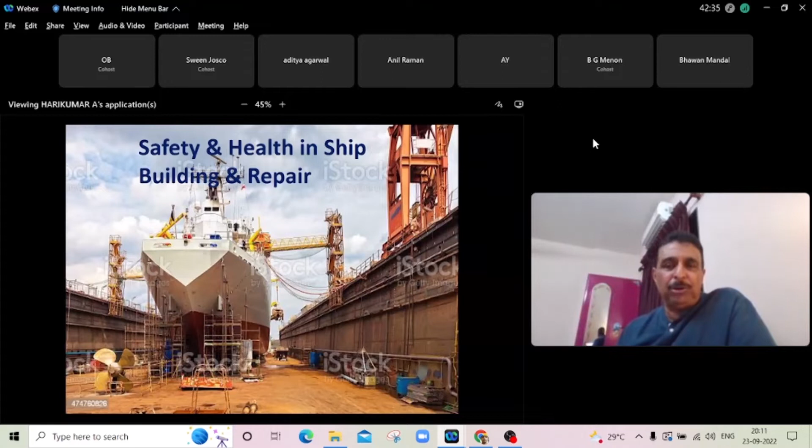So it is very relevant that people in the academic world also get some exposure as to what we at a shipyard look at as safety. This picture shows a ship which has been dry docked for repair. So shipbuilding and ship repair, both of them are called 3D jobs: dirty, difficult, and dangerous. So I will try to walk you through how we make this job as safe as possible.

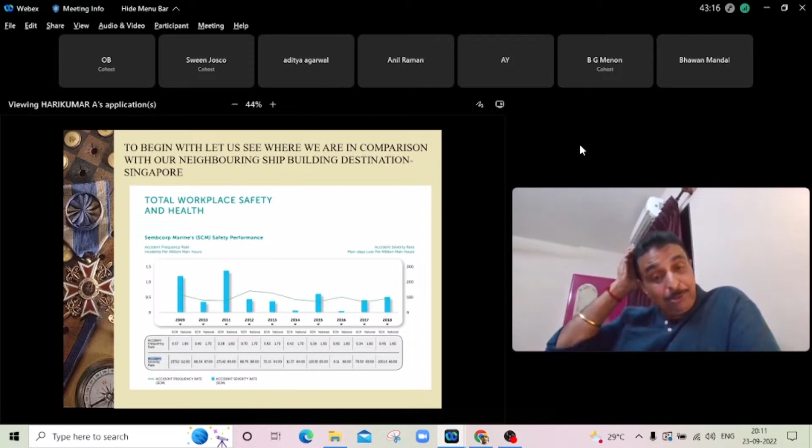Before we start, this slide gives you where workplace safety in shipyards at large stands, at Singapore. Because if you see, near India, one place which has serious shipbuilding and ship repair together, Middle East has ship repair, Singapore has both shipbuilding and ship repair. That is why I took the statistics of shipbuilding and ship repair.

If you see the accident frequency rate, incidents per million hours in Sembcorp Marine is 0.57. It is going from 0.57, it is hovering around 0.6 to 0.45, there around it is hovering. And accidents per man days, severity rate, if you see, this is also varying, but more or less it is something like 300 per million man hours, somewhere it is hovering.

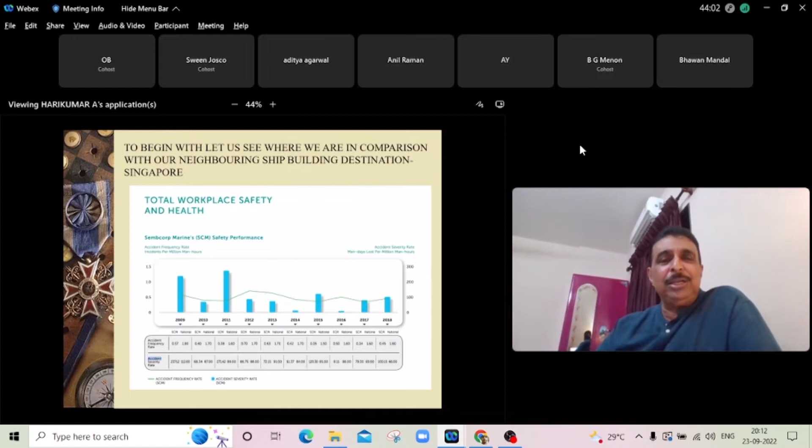So coming to India, you can see the rate is somewhere near, if you see Sembcorp is 0.64 to 0.56. Cochin Shipyard, my parent company and the group, is hovering somewhere around 0.36 in 2019 to 0.07 in 2021. How Cochin Shipyard has been able to bring this good result is basically because we do not do anything in an unsafe manner, and there is a very elaborate procedure that is being followed to ensure that we work safely.

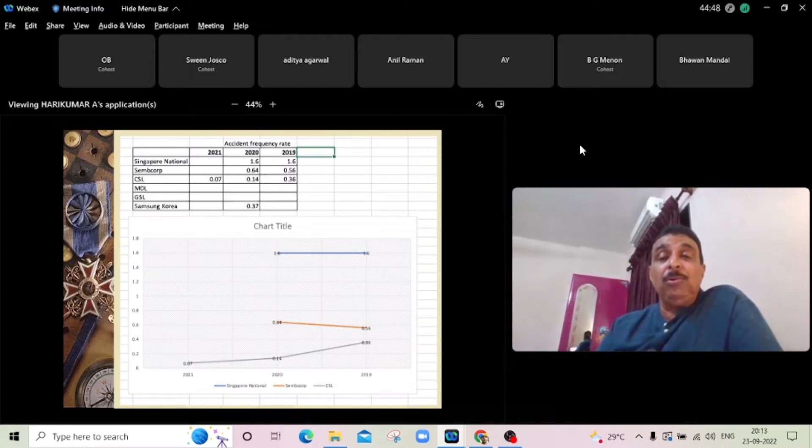I will walk you through that process. Before we get into the details, it's very interesting - in an organization, everybody thinks of safety from a different angle.

Let us say a ship is being fueled to go for sea trials or before delivery. On a normal cargo ship, you will be taking something like 300 to 400 tons of fuel for the trial trip, and much more for the delivery, for the owner to take the vessel home. A safety officer in many shipyards feels that when a ship is being fueled, all nearby ships should also stop doing electrical work and hot work, because this poses some fire threat. But for an operational man, I would say I will stop such works on board my ship, but a ship which is tied up 500 meters away, what is the problem? So there always some conflict occurs, and somehow we have to resolve it and go forward.

In a factory, another instance - once this engineer was me only, I found one small unsafe act being performed. So I stopped the work. I told them not to do this, go to safety, get the right method to do this. And I told the safety man, 'You need to do a pep talk to these people, because normal fitters, some of them may be ignorant, and they need some hand holding, some sort of talk or motivation, something like that.'

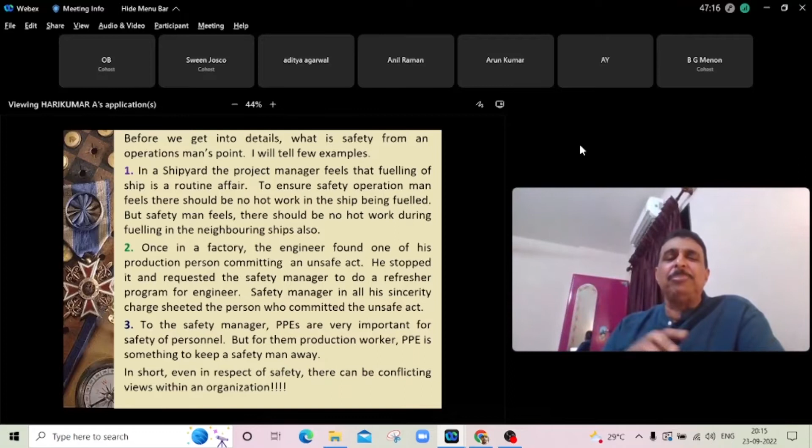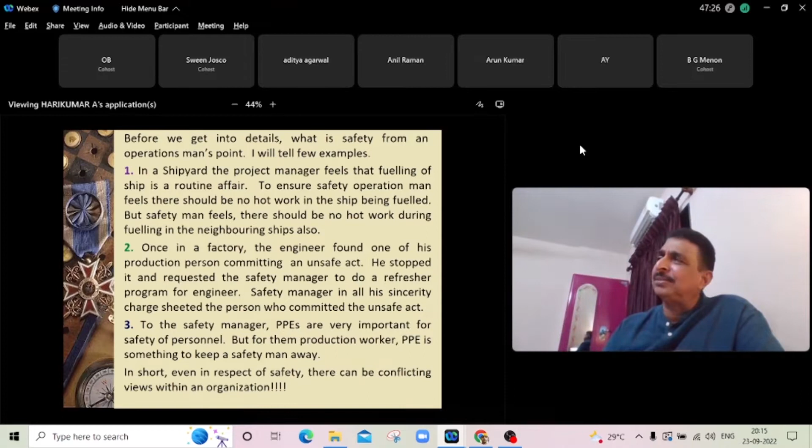So there are differences. Coming to the simple case of personal protective equipment, it's very important for a safety person, safety officer, CEO or senior management person. But for a normal production worker, PPE is something to keep the safety man away. So within an industry itself, there are different ways safety is looked upon, and some conflicting views within the organization. As a factory, we have to live with all these conflicts and make sure we deliver a ship in good time.

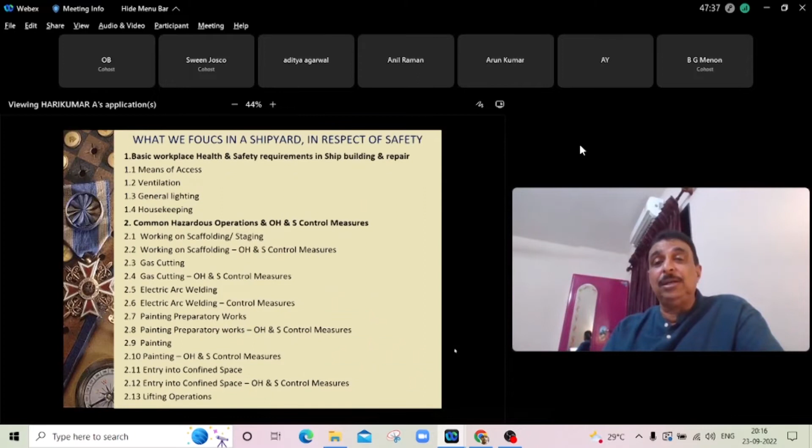Now, coming to how we focus in a shipyard with respect to safety, I have listed out about 5 major headings which we follow very thoroughly, judiciously, religiously, and this has helped us keep our accident rates or unsafe incident rate very low. So I will walk you through this, and if you have questions, you can ask.

We start with the basic workplace safety requirements. Unlike a factory where material gets processed and a final product comes out, in a ship the product is stationary and everything goes to the product, and the product gets completed. If you ask me whether shipbuilding is a production process, you can say it is, but I would say it is more of a project type of job.

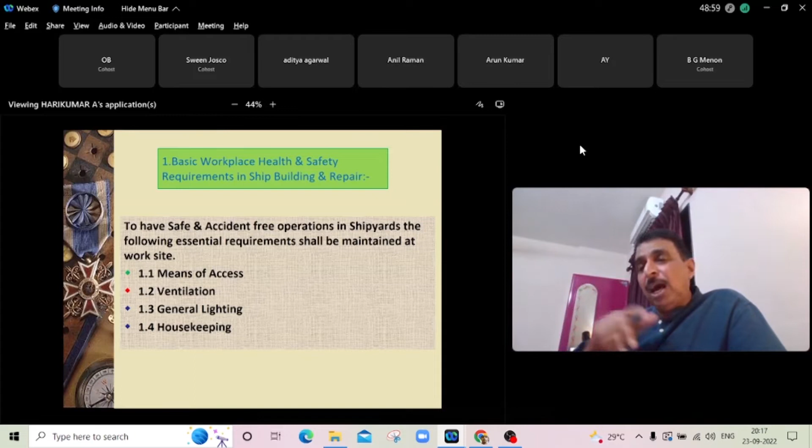So there are multiple functions, multiple disciplines working at the same time, and depending on the size of the ship, a large number of people go to the ship. So a proper means of access is very important for a ship.

And in a ship, there are two situations where people have to access the ship. One is when the ship is taking shape on a dry dock, dry berth or slipway, where the ship is stationary. And another one is when the ship is afloat.

This is very important for a shipyard, because a large number of people at a stage, depending on the size of the ship, 300 to 400 people may go into a 100-meter, 120-meter ship. So safe access is the first and foremost important thing for a shipyard to provide for his workmen or workforce, and there are standards which we follow for that.

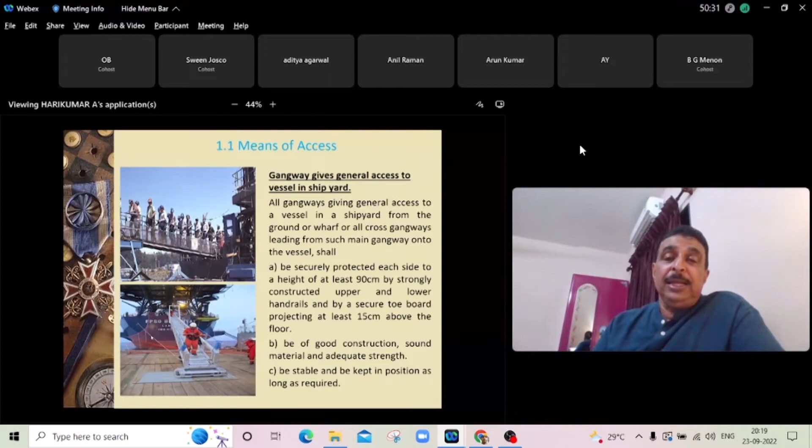Then, in a ship, if you see, except probably the deck and the wheelhouse, you have confined spaces all over. If you take a normal cargo ship, only the accommodation area to some extent can be called open. The other areas are confined spaces with no windows, no doors, nothing. And you have to send manpower into these areas to do works like welding, cutting, fitting up of outfits, fitting up of machinery, alignment, setting to work, commissioning, etc.

In a ship, during the construction stage, permanent lighting and permanent ventilation will not be on. In the case of a cargo vessel, there will be no permanent ventilation in the cargo spaces, and in many cases, if it's an oil tanker and such, there will be no lights. Temporary lights will have to be rigged. So we have to provide clear ventilation to the people who are going in and working.

If you see, normally we use axial flow fans or radial flow fans, both are used. If there is more than one manhole available for a tank, we can use an axial flow fan on one of the openings and use the other opening for inlet and exit of people. Or if it is a single opening tank, we can use an axial flow fan with flexible hoses and things like that.

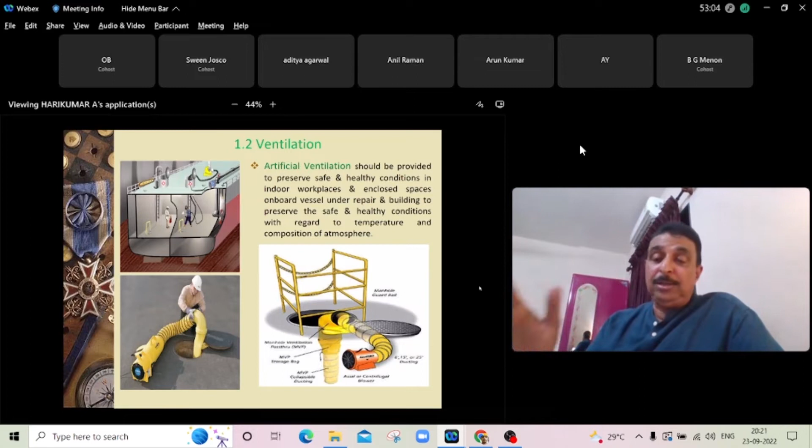So you can see the slide where this is shown. Depending on the size of the tank or confined space, we use multiple ventilation fans, ventilation ducts, etc., and make sure adequate air is given to the people and the air is circulated. If hot work is there, we use a suction fan and a supply fan so that fumes are extracted and fresh air is sent into the confined space continuously, so that personnel in the tank are as comfortable as possible and can perform their job in the best manner possible.

One of the hazards involved with working in confined spaces and ventilation is that in a shipyard you will always have oxyacetylene torches and compressed air hoses available. Compressed air is used for running grinding machines, small drilling machines, gouging, chipping, and many such production related activities. Oxyacetylene hoses are always on board a ship for gas cutting. So there is a tendency among common workers to use the oxygen, since it is pressurized, to get a little more comfort - they remove the oxygen hose from the torch and use it to get some cooler air.

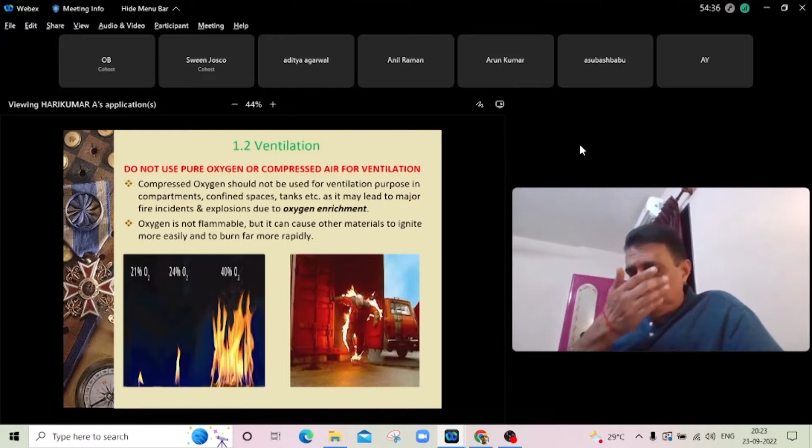Some of the accidents that have happened in shipyards from this, if you see the results, are terrible, because you have an atmosphere enriched with oxygen, and you are creating fuel also by way of your working. Suppose you are working with materials like wood, and it just gets a flash - then it is a disastrous result. So we always make sure that this is not done.

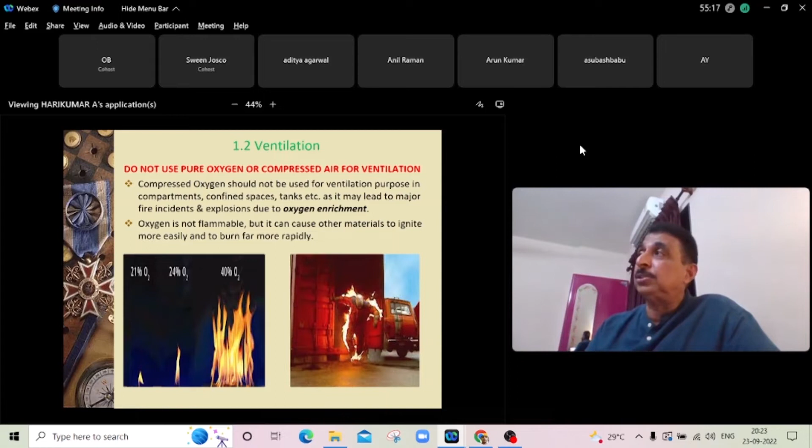One of the ways we ensured people do not misuse oxygen in confined spaces is constant vigil, and continuous education of people about the ill effects of using oxygen this way. Another thing we do is never allow people to leave hoses connected when there is no cutting happening. People say cutting hoses are long and difficult to take away, so one thing we tried, and succeeded with, is rigging up hard plumbing on board ships through the main alleyways and limiting the length of oxyacetylene hoses to about 20 meters, so people cannot say it is heavy to carry when not in use - 20 meters of hose can be shifted any number of times.

This was one area where we tried to improvise for the comfort of the worker and to ensure safety, and we got good results. So one of our practices is to use oxyacetylene hoses of minimum length possible, 20 meters, because considering the size of a tank or confined space, that is the minimum required for a person to work in different locations. We also have hard plumbing with isolation valves at regular intervals, so that in the unlikely event of an undesirable incident, you can always isolate it.

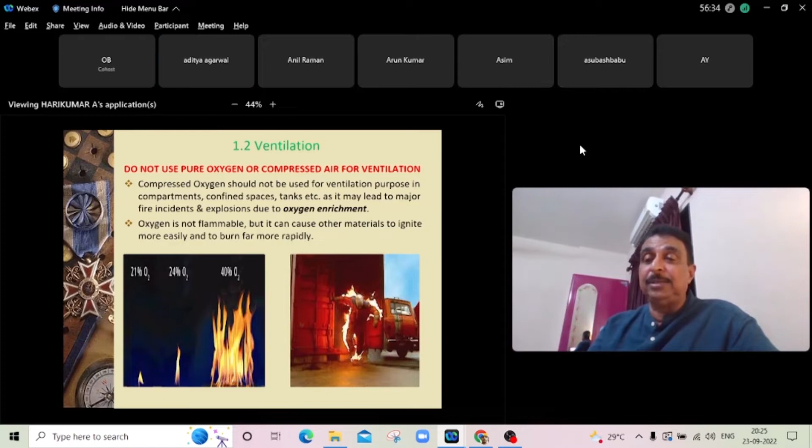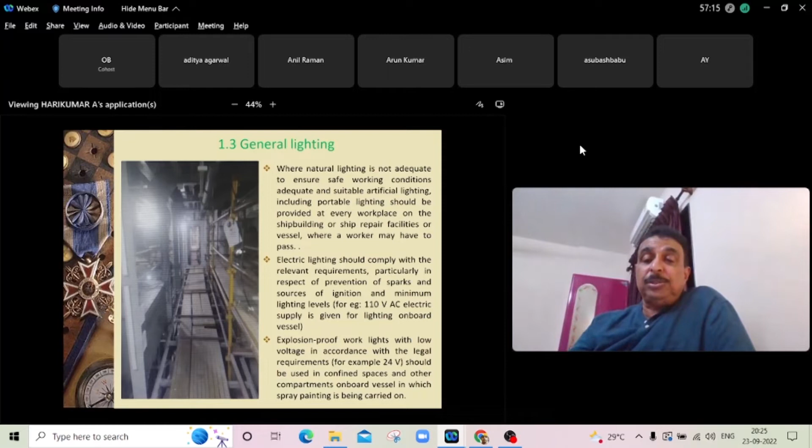Second thing we look at is general lighting. Most compartments in a cargo ship have no lighting, so we have to provide it. Generally we use 110-volt light for general lighting in confined spaces, which is safe and does not create a health hazard situation. Where painting is going on, or work with materials like PUF, we use 24-volt lamps, which are also explosion-proof, so there is absolutely no chance of sparks being generated by a bulb that breaks or gets damaged. 24-volt also ensures a less hazardous power source for lighting.

These lights are also very regularly inspected and corrected, so that glare is avoided as much as possible and clear light is available. We monitor shadows and make sure there are no dark corners. These are all things we do to keep general lighting comfortable.

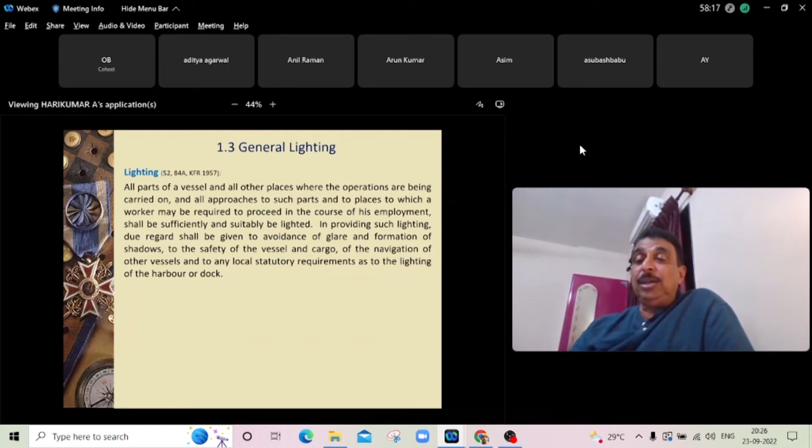Now we come to the next important point: housekeeping. This is another thing which is very important. One of the biggest problems we face in India is that, since we live in a place with very high population, we generate a lot of garbage.

So little bit of garbage accumulating here and there, people do not even see it. That is my feeling.

We in the shipyard make sure that good housekeeping is always done, and on a day-to-day basis the debris and the scrap and the waste generated is removed. So how we do it is we follow a few things in my shipyard.

One, every contractor or every company working in my company, the work order stipulates that they have to clean their work every day. Again, if we find this is not happening, senior most people, general manager level people, go there and personally make sure housekeeping is done. We also participate in the housekeeping.

We don't shy away from doing half a day's housekeeping. Beyond this, we make sure that the health and safety officer assigned to the vessel has to certify that regular housekeeping was done by the party who has put up the bill, so that his payment can be recommended.

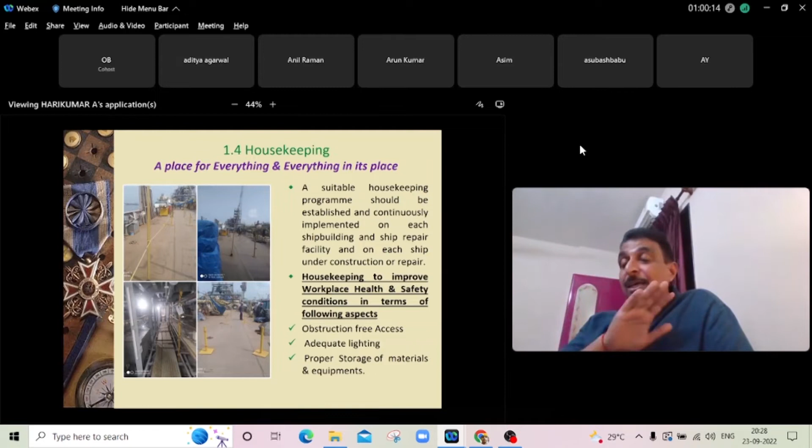This had a very good result in our shipyard. We made sure ships are clean, things are where they should be on a day-to-day basis, things are removed, and we have safe walkways, dedicated escape routes, everything is maintained.

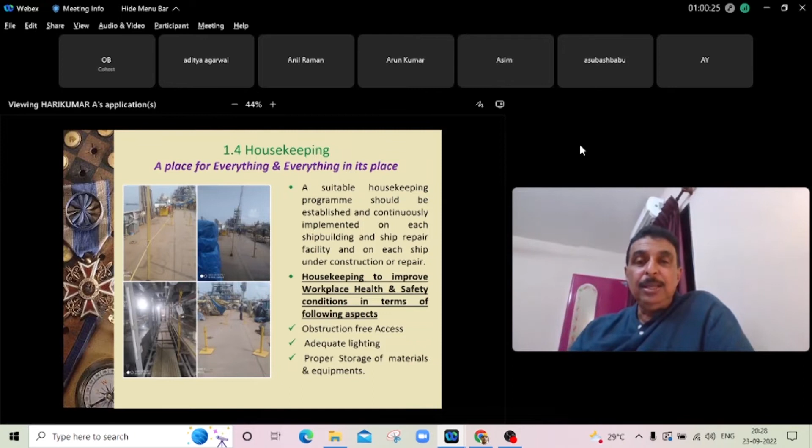So these are a few things which are necessary to ensure proper housekeeping, proper storage of materials, removal of scrap, waste, debris at appropriate intervals. Materials and equipment which are not immediately required at the site should not be placed or allowed to accumulate there. This is very important.

Everybody has got a tendency to stock a week's worth of needed material at site. So what we do in our shipyard is create transit areas where they can stock, and only necessary material will be allowed to be taken on board.

Then for passageways, when there is a flushing machine or oil related drums or something, we always use a save-all tray so that oil does not get spilled onto the deck and create slippery areas. Nuts and bolts are never allowed to be left idling.

Rubbish, dirt, cutting wheels, welding electrodes, buffing wheels - everything, we make sure this goes, and areas are clean and safe for people to work.

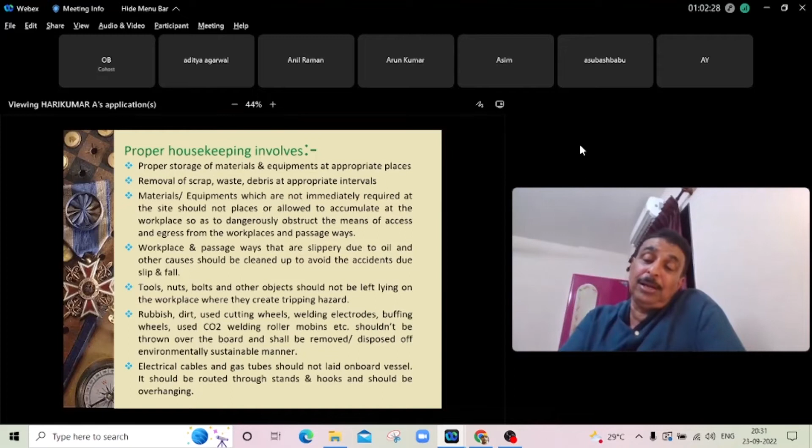And we always make sure, as I said, we practiced hard plumbing with minimal cutting of hoses. We also make very dedicated pathways or cable routes for temporary cabling used for lighting equipment and temporary power to the ship, always making sure gases and power are kept separated, so that electric spark leading to ignition of gases does not happen.

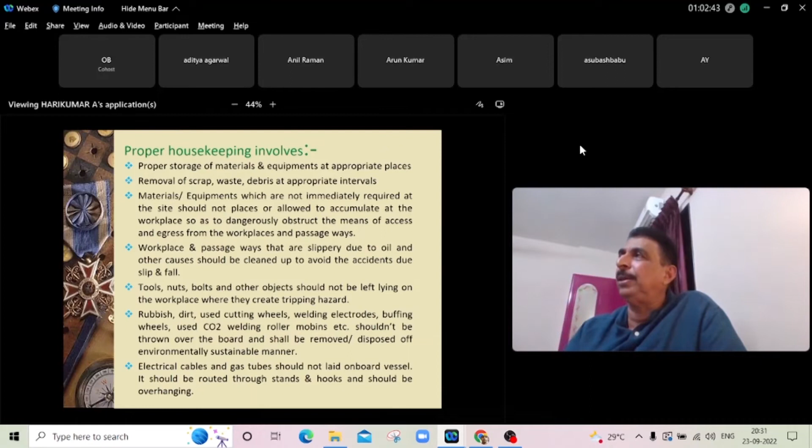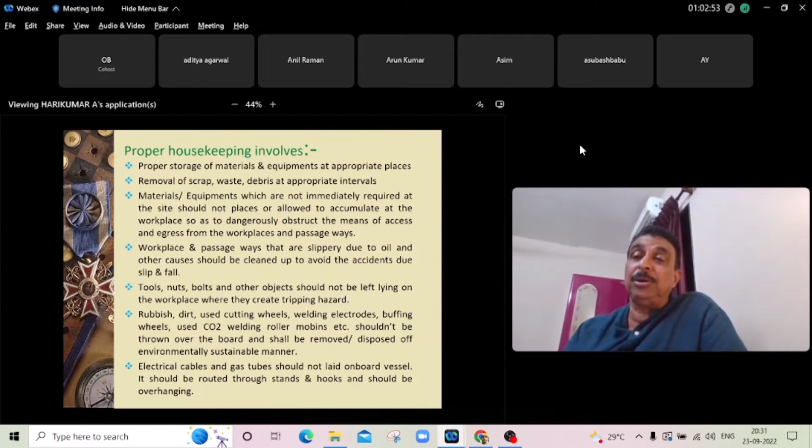This is a very tiring exercise, but what we do is make the production man also responsible for that. When he comes up with a work permit, he has to sign that all this is done, and then the safety man only has to cross-check and give approval. So safety becomes everybody's business - everybody is a safety officer. That is how we manage this.

A few pictures just to give you a feel of some good housekeeping practices and some bad housekeeping practices. I can say when 300 to 400 people work on board a very small vessel, it's very difficult to get this kind of housekeeping done on a day-to-day basis.

But what we practice is the senior most people make sure they inspect the vessel, take rounds, and make sure these things are kept spick and span so that you do not run into problems. There is no shortcut for this, unfortunately.

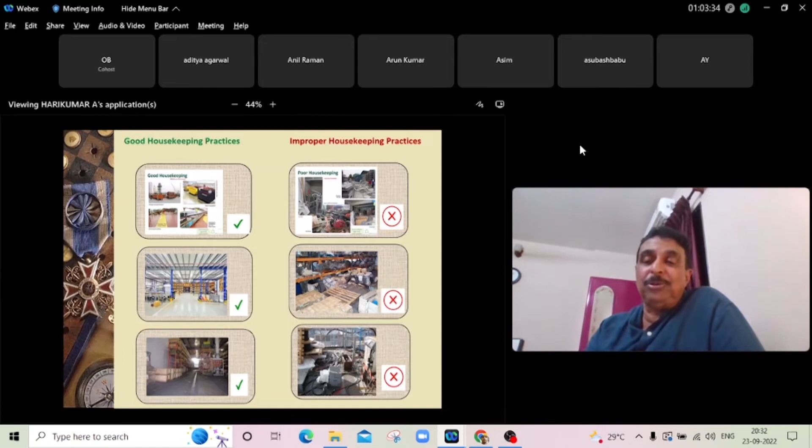Some more pictures of good practices and bad practices for you to see. These are all taken on board vessels. These were all conditions which we used to face at one point of time, and after we started educating, that's the results we have seen. So both of these are from our own organization only.

So we also had problems at some point of time. We have worked very hard to bring it back to very good systems with continuous training, continuous motivation, and continuous engagement with the people concerned.

We come to the second thing, which is scaffolding. You have to do scaffolding for shipbuilding work, for doing various activities, for the hull to be constructed, access for fit up, welding, weld visual, NDT, etc.

For painting, electrical work, piping work, and outfitting work—inside and outside—in all these areas we need to put staging. Shipbuilding uses built-up type of staging, totally made of steel. In our yard, we have stagings which can be quickly assembled and dismantled.

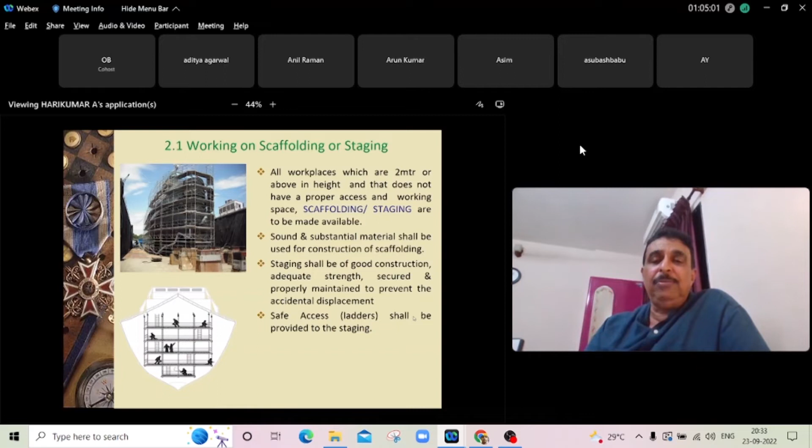This is the general view of the staging that you see. We have some more pictures. Let me explain how it will be done.

At a workplace, there is one platform where people are supposed to work, with handrails provided in the areas where people are working. About 2 to 2.5 meters behind it there is another platform, which is a safety platform. The staging which is put for people to work requires them to work along with their tools and tackles—hammers, strong backs, wedges, pipe pieces, welding sets, a variety of equipment. People have to stand, work, exert force, and keep their tools and tackles, so stagings are designed to work safely.

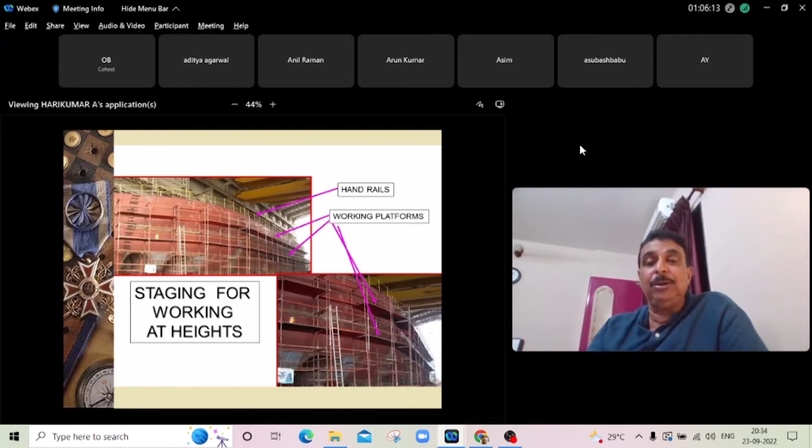No staging is accepted without ladders for access. There are working platforms and safety platforms, as I said. This is something like what a staging will look like, and an approach ladder is always given for going into the place of work.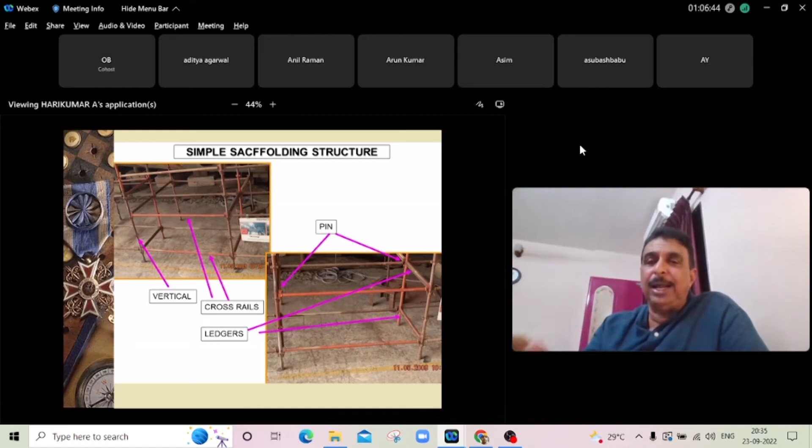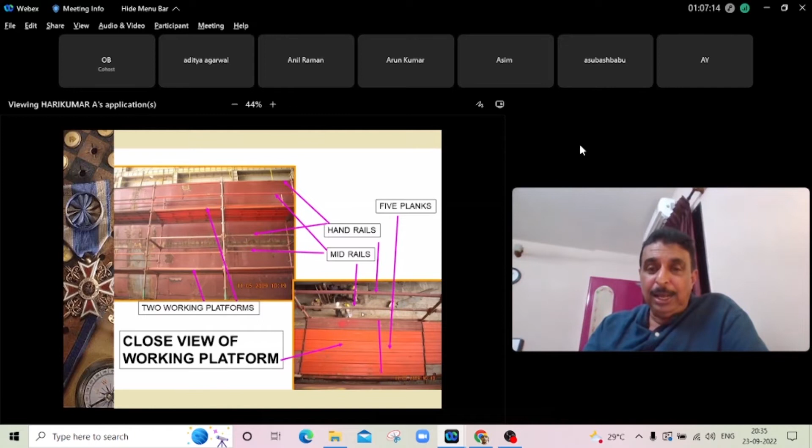This is basically the staging. It comprises of verticals—this is the vertical portion. This long pipe we call the ledger, and the small members across we call transoms. So we have vertical, ledger, transom, and between the transoms we have planks. Our staging design allows us to put 5 planks on a platform, and 5 boards are compulsory to be put before we allow staging people to work. Then there is 1 handrail and a safety handrail—2 handrails—used as handrails, and also for people to hook their safety belts when working, so that they are doubly safe.

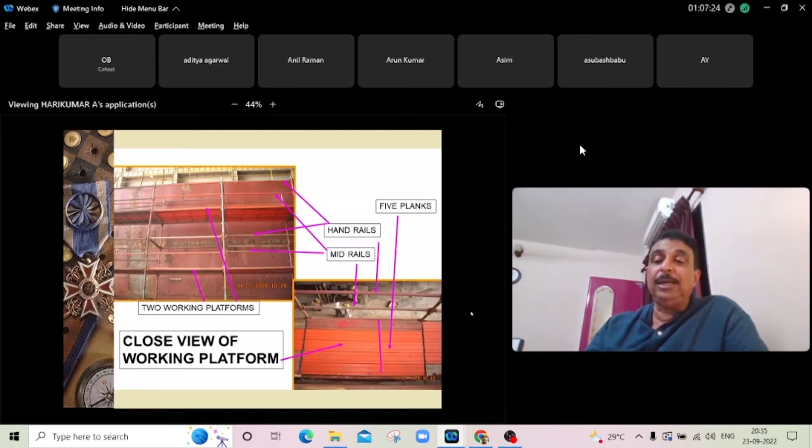Hazards of working on scaffolding include persons falling, fall of articles, people throwing down materials, and the scaffolding structure getting deformed or displaced because of the process of work.

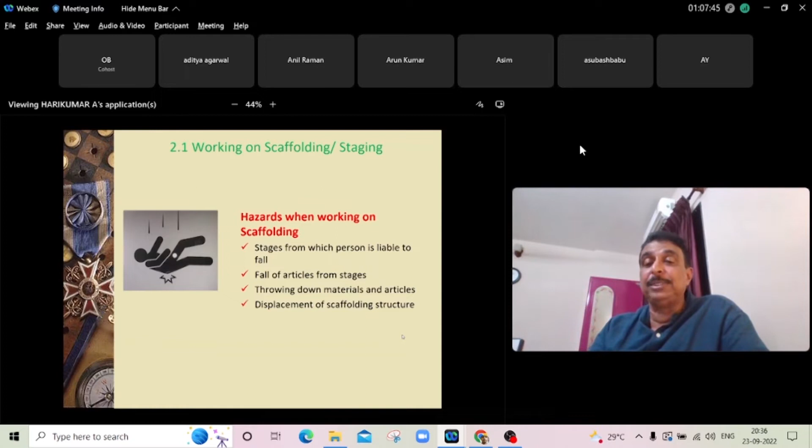Every day, the staging inspector follows up on the staging which is being used and tags it. Above about 2 meters, it is compulsory in our yard that workers use a proper safety belt with a lifeline. This is compulsory for us, so we make sure that nobody is working under the risk of a fall.

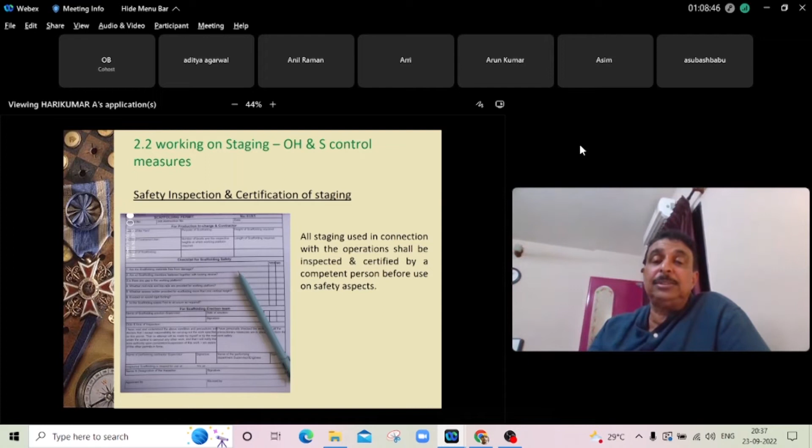After the staging is rigged, a written form has to be filled up and permission from safety has to be taken. Making someone sign something brings a lot of accountability to the person concerned. This is one of many permits we use—a staging permit.

Depending on daily use, every set of staging is given a scaffolding tag—either it can be used or it cannot be used. Our levels of training are so good that nobody will go on board a staging tagged 'do not use the scaffolding'; people will only go on staging that has the green 'safe to use' tag.

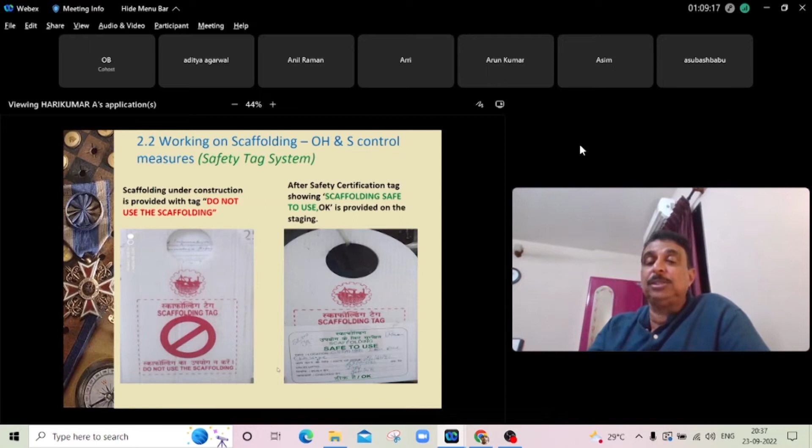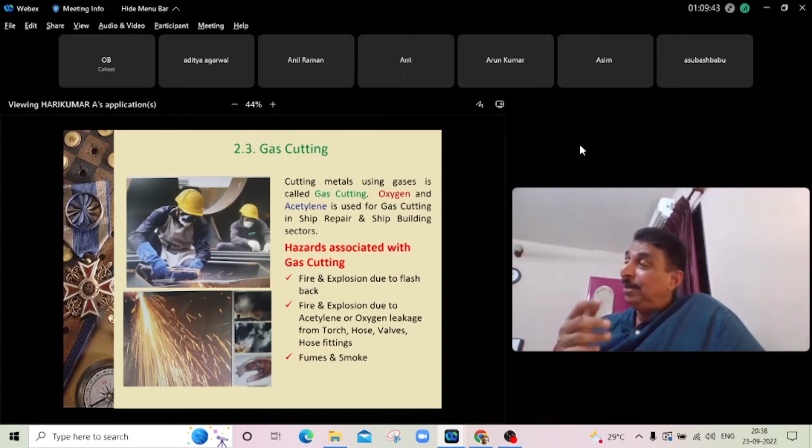Another thing is gas cutting. The hazards with gas cutting—as I mentioned before—if oxygen is being used as a coolant, it can cause a problem. If acetylene leaks, it can flood the compartment and create a problem. A cutting set can backfire, and that can also create a problem.

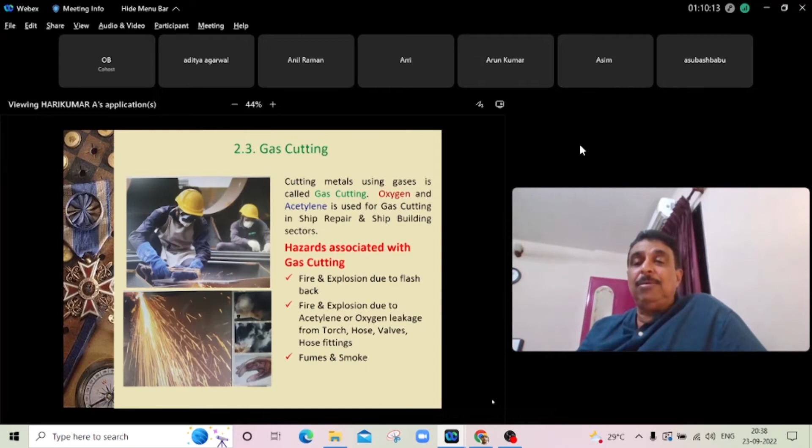A hose can catch fire—a hose with a small cut can leak gas and catch fire. There are varieties of problems involved with gas cutting. So a few things we do to make gas cutting safe: every gas cutting equipment will be removed from the workplace or enclosed spaces when not in use, even during breaks or at the end of the shift. We also make sure we use only 20 meters of hose, which helps the man work safely.

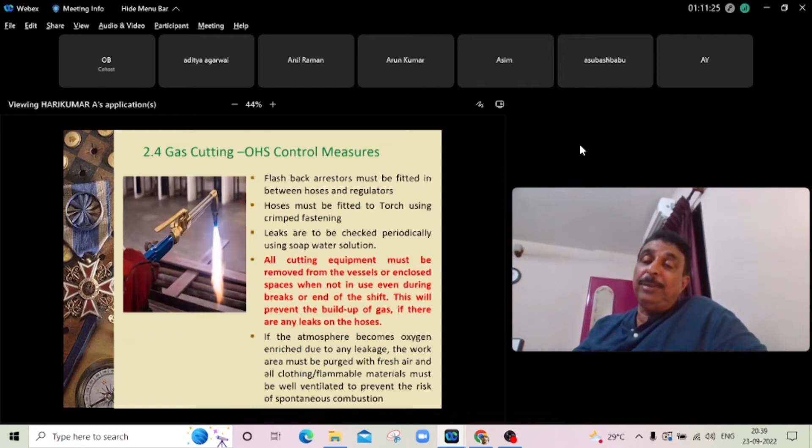Flashback arresters are compulsory between the hoses and regulators, and we do not allow hoses to be fixed to the torch with any jugad. We always make sure it is properly crimped fitting or with a proper jubilee clip. These are some cares which we take during hot work and in case of hoses going to confined spaces. We do not allow people to start working unless the safety man checks the hose with a soap solution and makes sure there are no leakages.

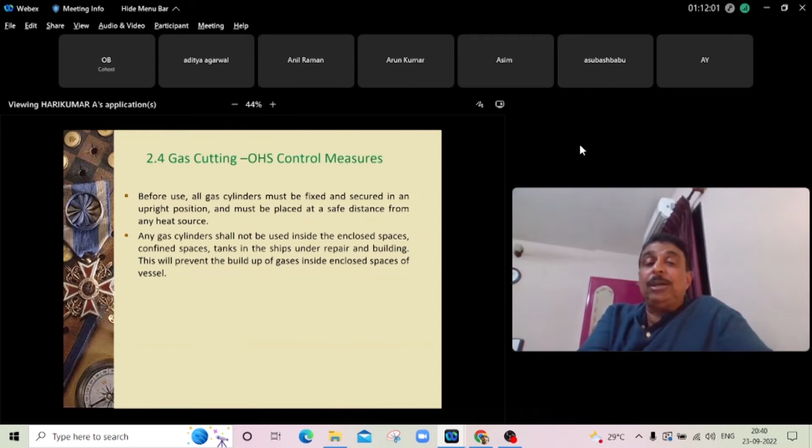So again, if we are using cylinders in our yard, we use them in upright position. For that we have dedicated trolleys which can be lifted and positioned near the work in case we have to use cylinders. Or from the gas bank, cylinders are always kept vertical and only the hard plumbing goes. Gas cylinders, never ever in any condition do we allow any gas cylinder to be taken to any enclosed or confined spaces. This is a total no-go for us.

Electric arc welding is another job we do. Here also the risks of fire, explosion, electrical shock, fumes, radiation, asphyxiation, all these hazards are there.

One of the things you have to understand is welding is a very peculiar profession because the welder works alone. Other people all work in teams of two because on board a ship, if you are doing fitting up, you need two people to work. If you are doing machinery alignment, you need at least two people. But welders work alone, so their safety is much more critical. The hazards they face are much more severe than other people.

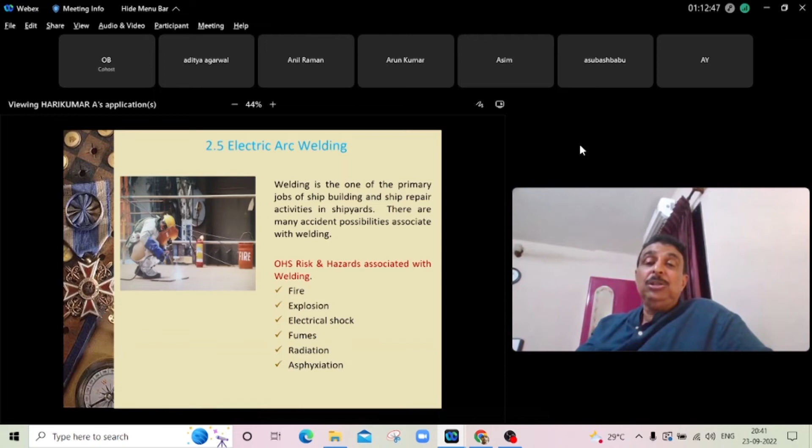So we have so many control measures in respect of welding. We do not allow any oil or other combustible material near welding cables which have cut insulation where the conductor is exposed; we never allow it to be used. We never allow cables to run through water which may have accumulated due to rain or anything. We only allow approved insulated jigs for joining the cables, and we monitor the size of the cable, and the cable should be routed. We have cable routes which help a cable to be routed at a slightly elevated level so that it does not lie down on the floor.

And we insist that ELCBs are fitted on all AC welding machines. And of course, above all this, protective clothing like aprons, gloves, goggles, everything we make compulsory for welders. Without that, no welder is allowed to weld.

There is also something to be seen here. When the welder is welding on an elevated platform and has to move around, they have a tendency to roll some of the cable and keep it on their shoulder. We are very stringent about this; it is a total no-go in our shipyard. We also do not allow cloth to be tied on the helmet, which is also a risk. And we never allow painting and welding to go simultaneously in a shipyard.

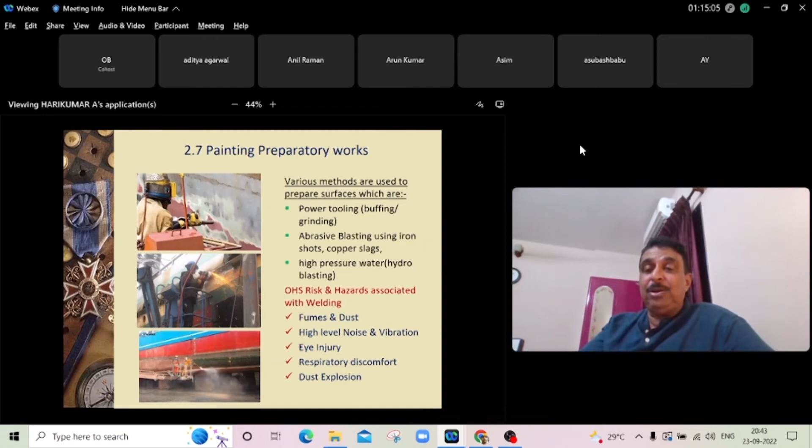These are some of the things we look at in welding. Painting is another important activity in a shipyard. We have surface preparation like blasting, high pressure, and hydroblasting with high pressure water for cleaning. This also creates risks - fumes and dust, high level noise and vibration, eye injury, respiratory discomfort, dust explosion, etc. So here also we have control measures.

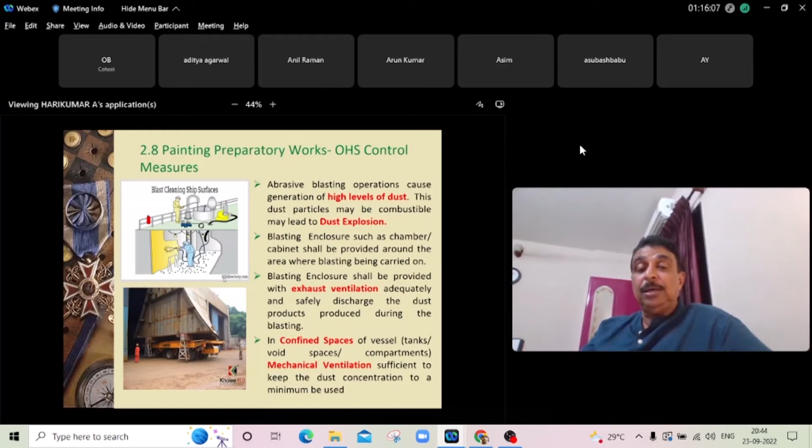Blasting enclosures such as chambers and cabinets are provided around the area where blasting is carried on. In our shipyard we have humidity controlled blasting booths where most of the blasting takes place, and here proper ventilation, proper lighting, everything is provided. There are fume extractors and dust collectors, so people work comfortably here, and personal protective equipment covers them from head to toe so that they are not exposed to the pressure or the abrasive, and they can work safely.

You can see their personal protective equipment, right from headgear with oxygen and air supply, and dresses covering their whole body, and things like that.

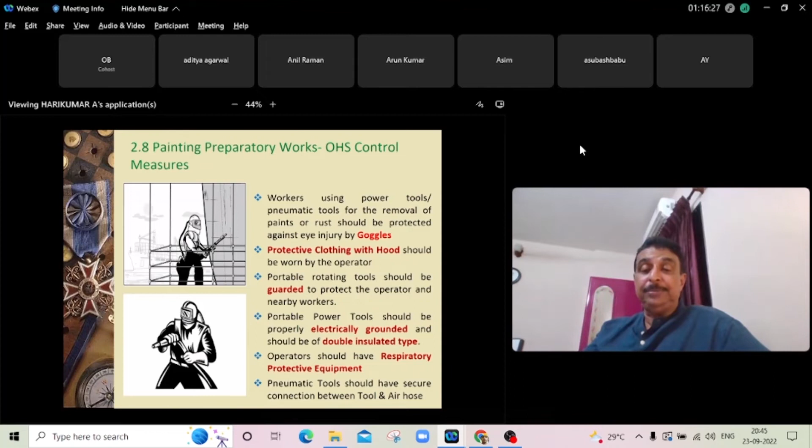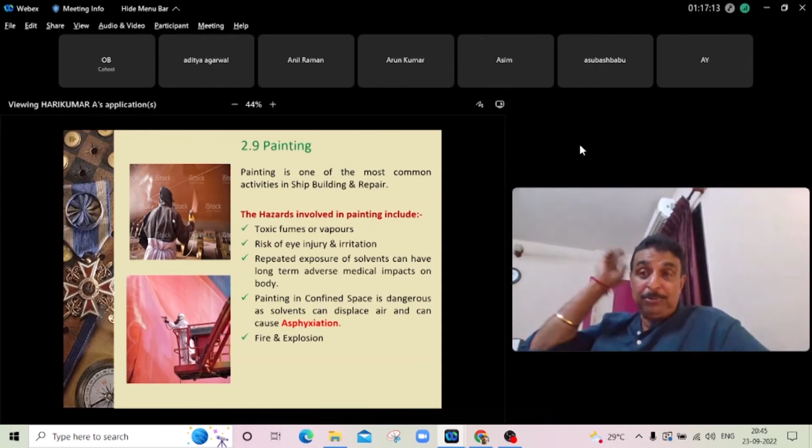Painting also creates toxic fumes or vapors, eye injury, irritation, and fire risks. When painting is going on in an enclosed compartment, we do not allow hot work to happen at the same time. Painting is always scheduled when other works are not happening, and after painting, for at least 2 to 3 hours, we do not allow hot work. For painting, only 24-volt explosion-proof lights are provided. This kind of safety measure ensures painting is done safely. These are the OHS control measures we use for painting.

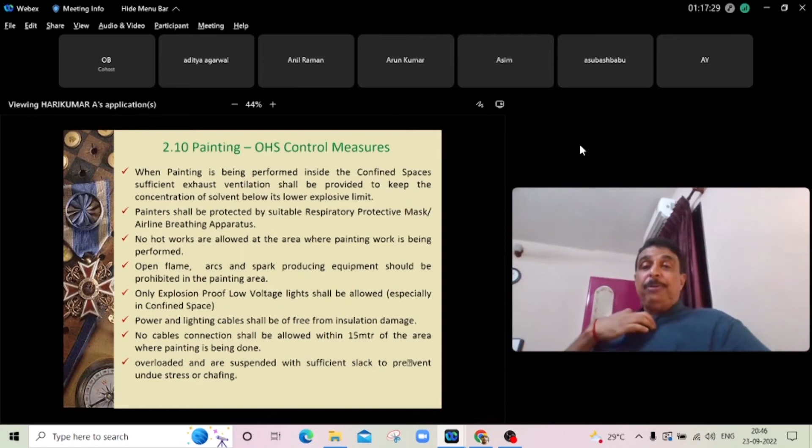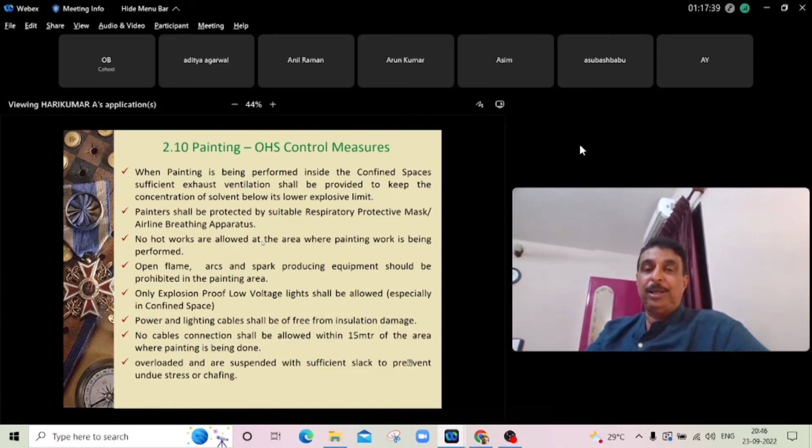When painting is performed inside confined spaces, sufficient exhaust ventilation shall be provided. Painters shall be protected by suitable respiratory protective masks. No hot works are allowed, no open flame works. These are some of the things we religiously follow, and touch wood, so far we have been maintaining a very safe environment and working condition for our painting colleagues.

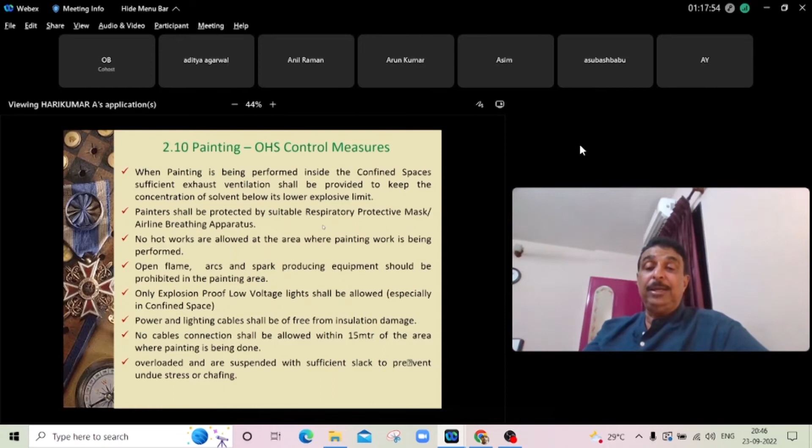Entry into the confined space. In both shipbuilding and ship repair, there are multiple hazards there. There can be toxic gases, there can be oxygen deficiency, it can be a flammable atmosphere. But you still have to go and do work in confined spaces.

So what we do is, unless a valid permit to work is obtained or issued, we do not allow people to go and work in confined spaces. As said at the start, air supply is provided either by breathing apparatus, if it's small work where rigging up big ventilation equipment is not practical, or by proper mechanical ventilation where people have to work for longer times.

We inspect the confined spaces on a daily basis for the presence of 21% oxygen, and absence of toxic, harmful, or inflammable gases. This is monitored daily, and only then do we allow people to go inside confined spaces to work. This helps us keep our confined spaces safe for our people.

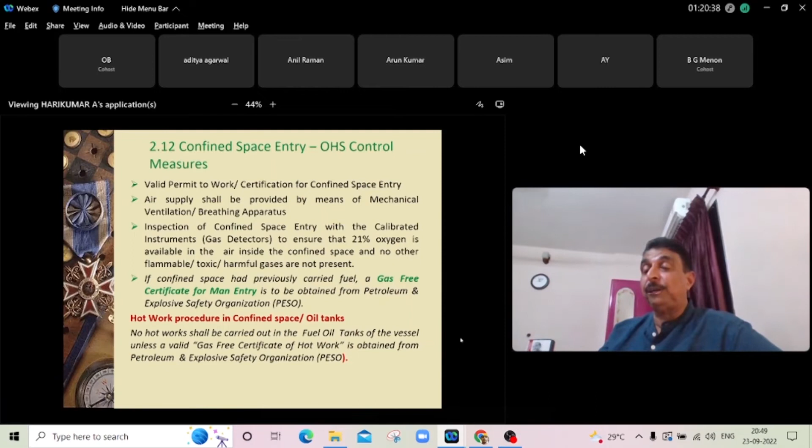Only where the hot work permit is given do we allow people to go. Even after PESO gives the hot work permit, every day before work starts, the gas levels in the tank are measured, and if there is any undesirable change, it's a stop-work, then clean again and bring back the Petroleum Explosive Safety Organization to get it recertified. There is no compromise on this. Our confined spaces and fuel tanks are always ensured to be safe for our people to go and work. So this is confined space entry.

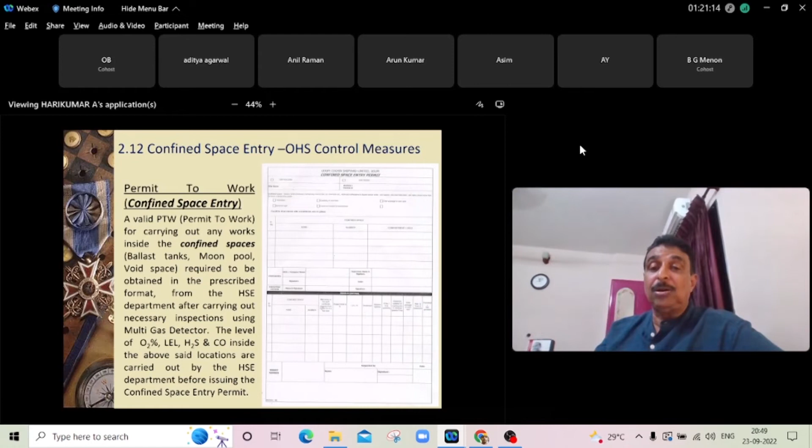We have a work permit - this is a sample work permit for confined space entry. Unless this is raised by the concerned person and certified and allowed by the concerned project manager and safety manager in case of a new build, and cleared by safety and by the ship's competent engineer or navigator, we do not allow confined space entry.

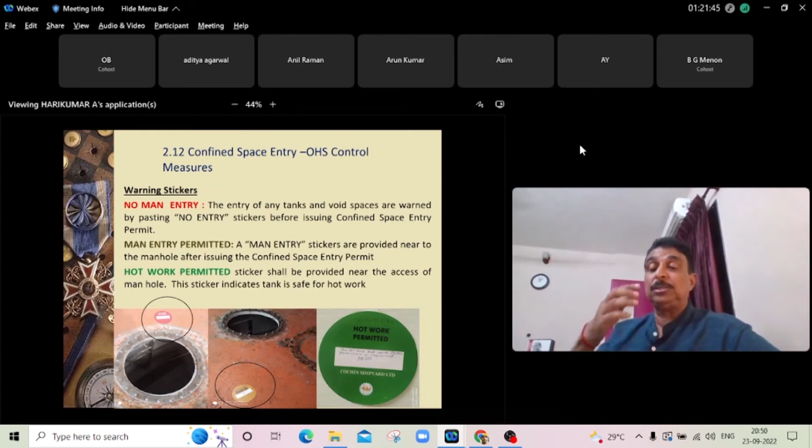This is easier said than done, so to make people aware, at every confined space we have three types of tags: no entry, man entry, and hot work. So people at a glance can see whether that area is good for them to enter, good for hot work, or good for entry only. This is followed very religiously, so people do not have any doubts about whether they can get into an area.

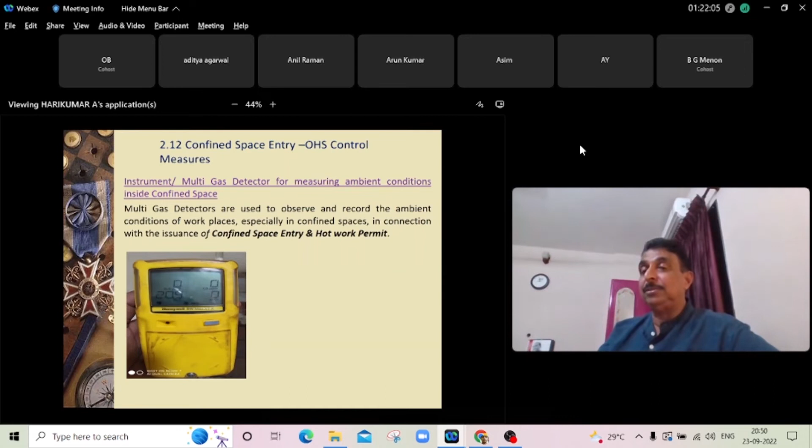This is a gas detection meter which we use for detecting gas. As said, every confined space's gas levels are monitored on a daily basis, and only when we find these areas are safe do we allow people to go inside.

Another important aspect is material handling. It is always important to make sure we are handling materials in a very safe manner. There can be problems with the crane, there can be issues of lifting tools and tackles becoming defective and failing, and there can be instances of materials dropping down from lifts being made.

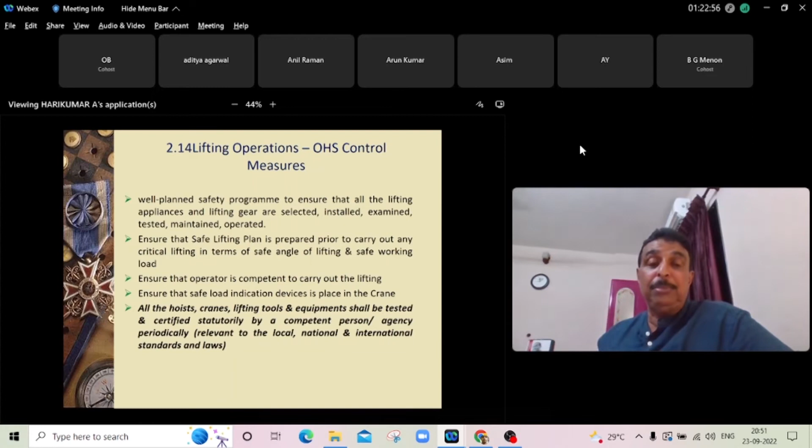In our yard, every lifting tackle is tested periodically as stipulated by the factory's rule, by a competent person, and tagged, and such equipment is only allowed to be used.

Before every heavy lift, we have a toolbox meeting where the material to be used, the slings to be used, the lifting plan, the position of the rigger, everything is discussed and signed off. The areas are cordoned off, and only the concerned people with the lifts are allowed in the vicinity.

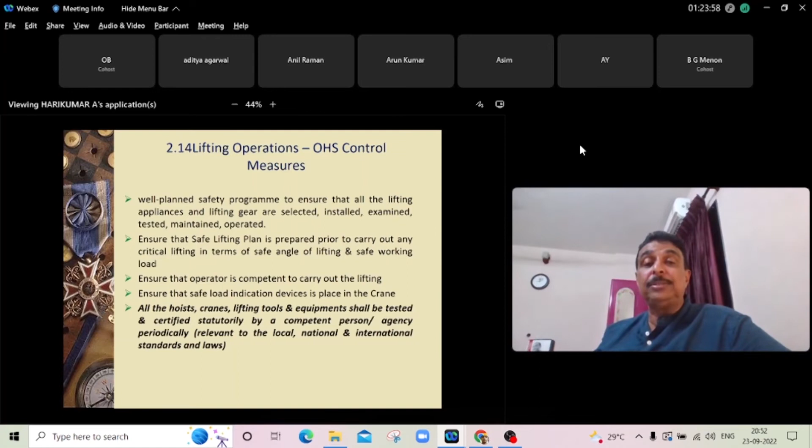These are all things we do to make sure lifting and turning operations are done safely. Turning is important too, because while building a ship, most of the time we build the blocks upside down and they have to be turned to be positioned. So these kinds of things we make sure, so that we lift and turn blocks in a safe manner.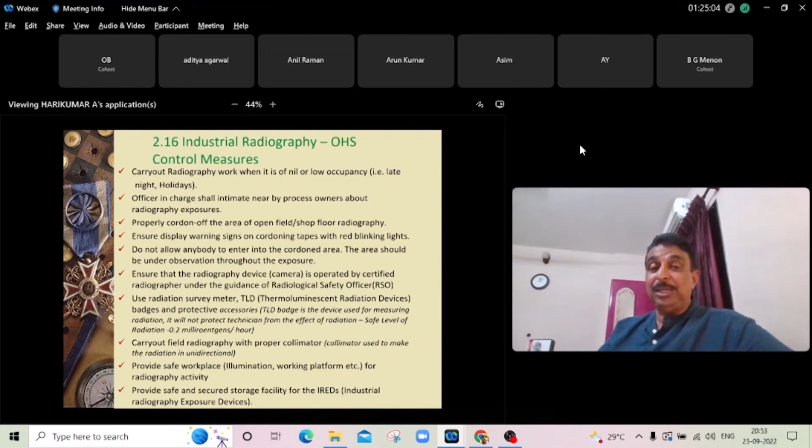We ensure that the radiographic camera is operated only by certified people. We use a radiation survey meter and carry out radiography with proper collimator. All this we do to make sure, and touch wood, we have been very good in respect of radiographic safety in our yard.

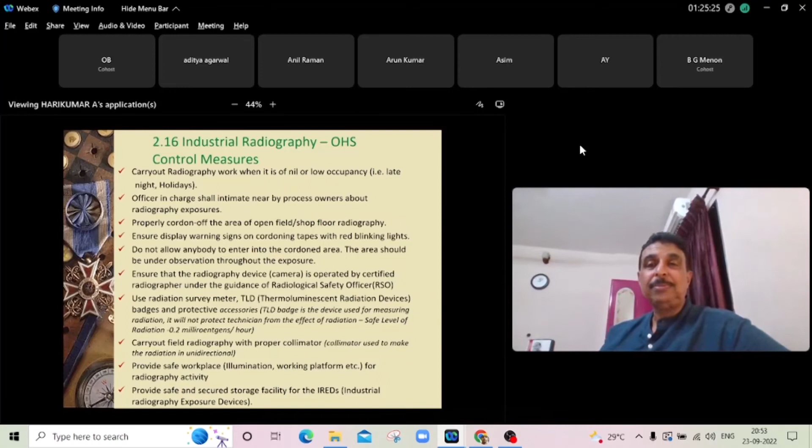Now we come to the third part - there are safe work plans and work permit systems. What we religiously do in our shipyard is every day starts with a stand-up toolbox meeting where the day's work is discussed in detail, to make sure conflicting or different disciplines do not clutter in one area, creating confusion. So work plans are discussed every day and decided who will work in which area.

A painter and a welder cannot work together, an alignment technician and a fitting technician cannot work together. So there are people who need their own safe and sound spaces. Our site work plans make sure that people do not clutter and everybody gets their time to do their work properly.

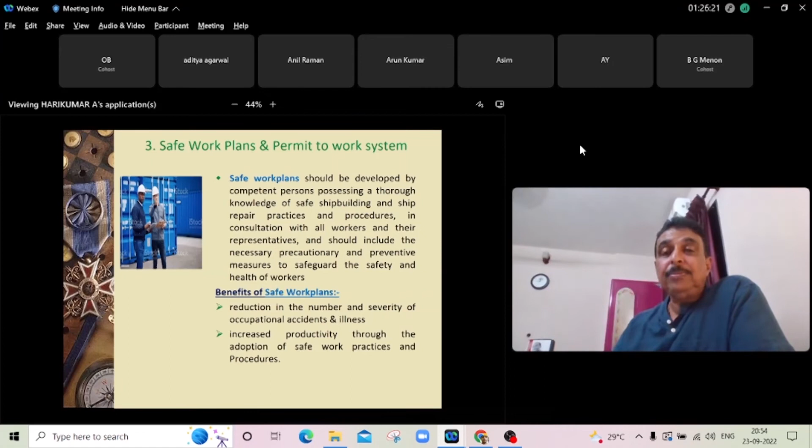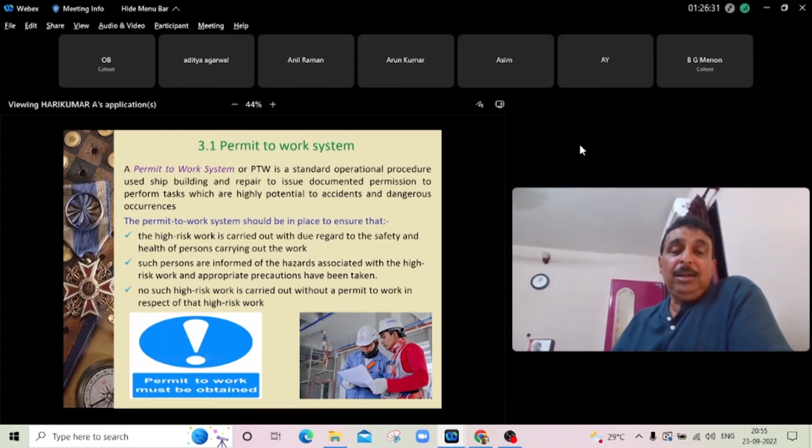And we have an array of work permits - I will go through those. We have got hot work permit, entry to confined area, working at heights, painting, pressure testing of hydraulic lines, radiography, transferring of fuel, electrical shutdown.

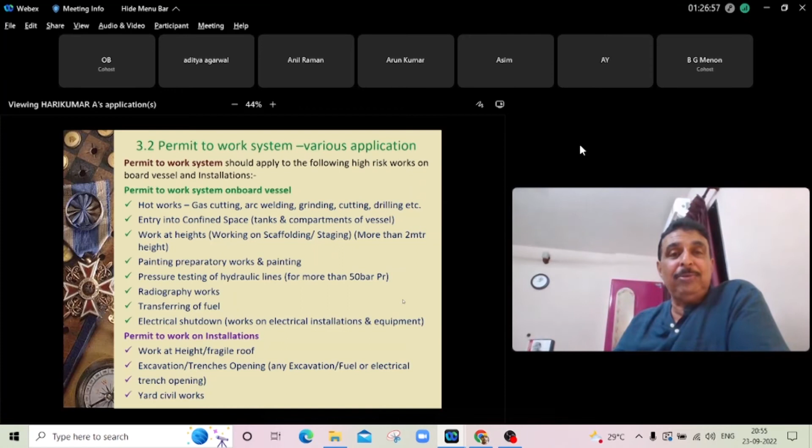These are for ships. In the case of our yard installations, for work at height or roof, excavation of trenches and opening, yard civil works - for everything we have a permit to work. So these are some examples of permit works.

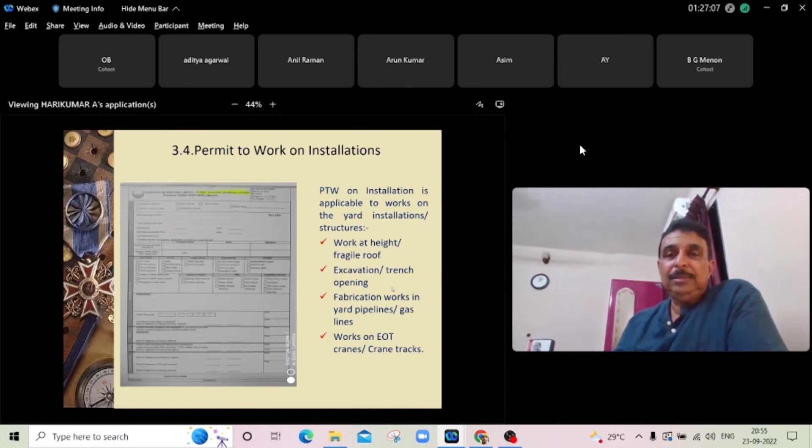More or less, no work takes place in our shipyard without a valid permit, and permits are generally given from 8 o'clock in the morning to 5 o'clock in the evening. If after 5 o'clock somebody has to work, they have to take a further permit to work after 5 o'clock, so that safety, production, and all concerned know that such work is going on and it can be monitored and ensured to happen very safely.

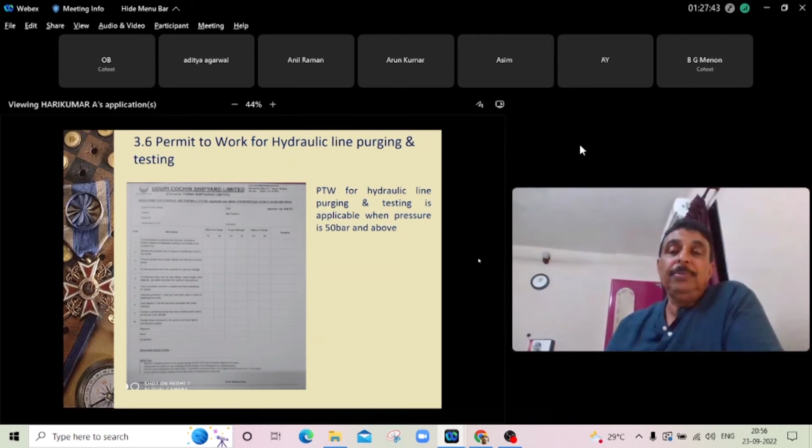Last but not least, personal protective equipment. If you see the hierarchy of controls, the last one is the personal protective equipment. But nevertheless, this also plays a very important role in protecting people from undesirable happenings.

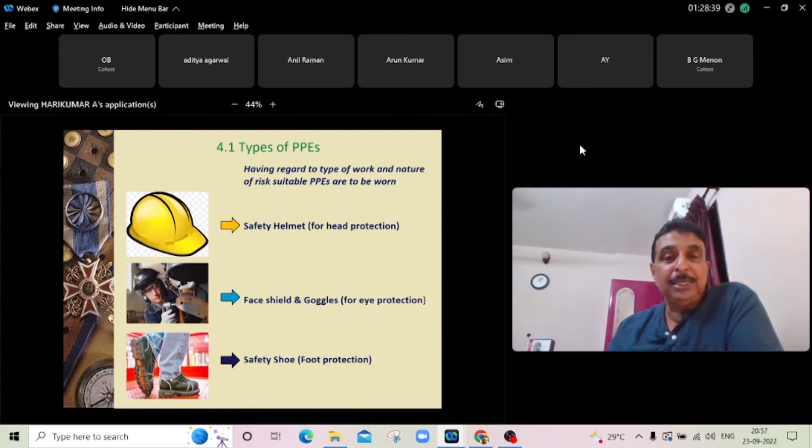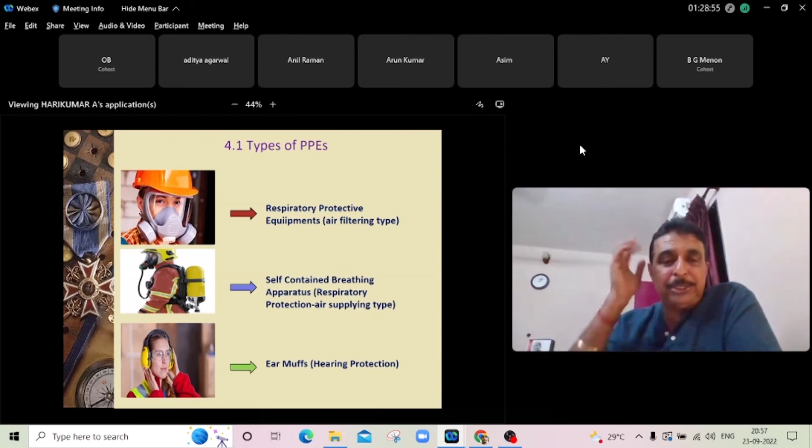Then for painting people, respiratory protective air filtering type masks, self-contained breathing apparatus - like if somebody has to go to a confined space alone for a small inspection or anything, we make sure he is carrying a breathing apparatus. Earmuffs when working in machinery spaces or where work is happening like pneumatic chipping or pneumatic grinding.

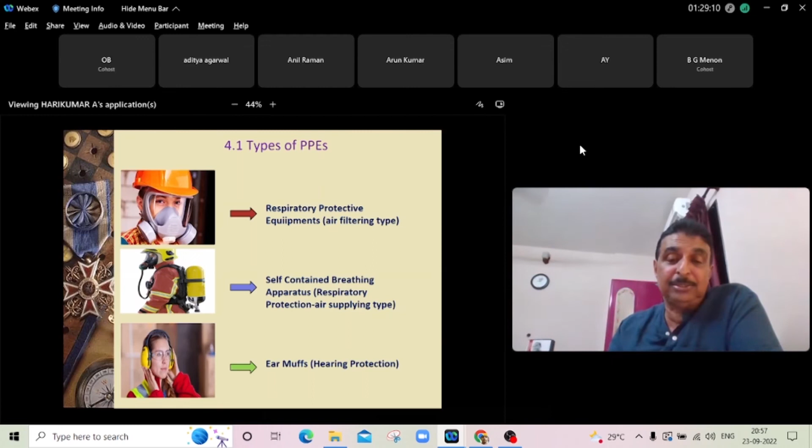Then radioactive protective clothing and masks for people who work on radioactive material. Safety belts - for anyone working more than 2 meters in height, a full body harness is required. We insist on that to ensure fall danger is not happening.

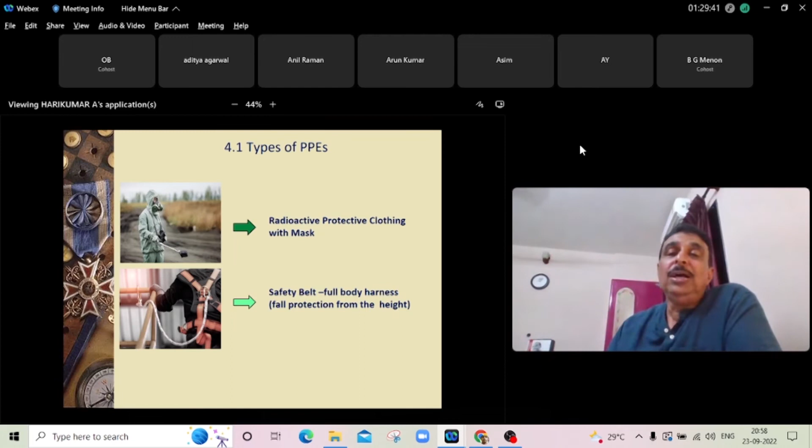Now, with all this, we also have problems. Problems can happen because what has to go wrong can go wrong. Towards this, we have contingency plans. We have ambulances.

We have emergency response teams for firefighting, first aid, resuscitation, shutdown procedures, evacuation procedures, chemical spill, self-contained breathing apparatus, and search and rescue. On a regular basis, we conduct classes by safety officers for our staff plus our contractors and workmen.

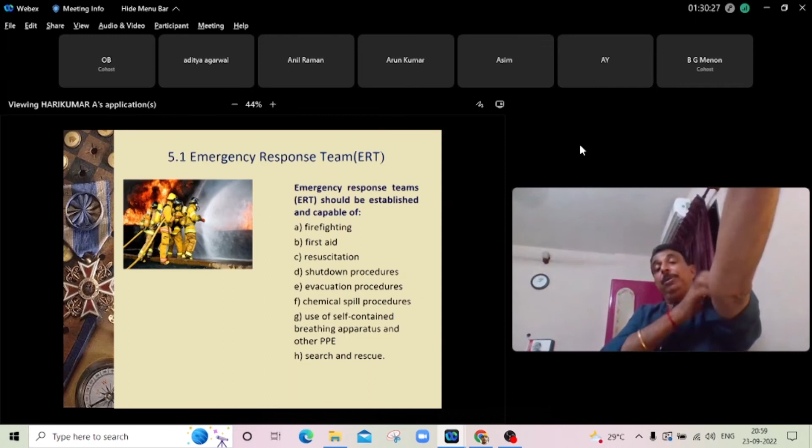Mock drills are conducted at regular intervals - firefighting, search and rescue, all these things we conduct mock drills for, so that there is always a level of preparedness in the yard, in people, in the unlikely event that something goes wrong.

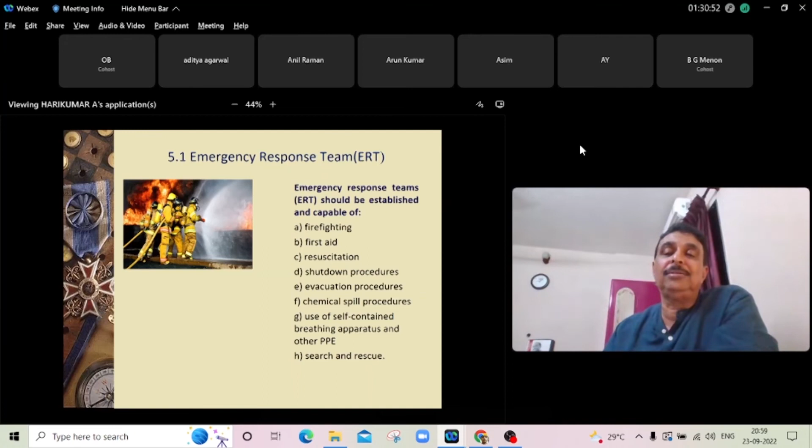So these are what we do on a daily basis to ensure that we work safely. From an operator's point of view, this is how we make our shipyard a safe place for people to work. Touch wood, thank God, we have been successful till now. Thank you very much, and if you want to ask me questions, please.